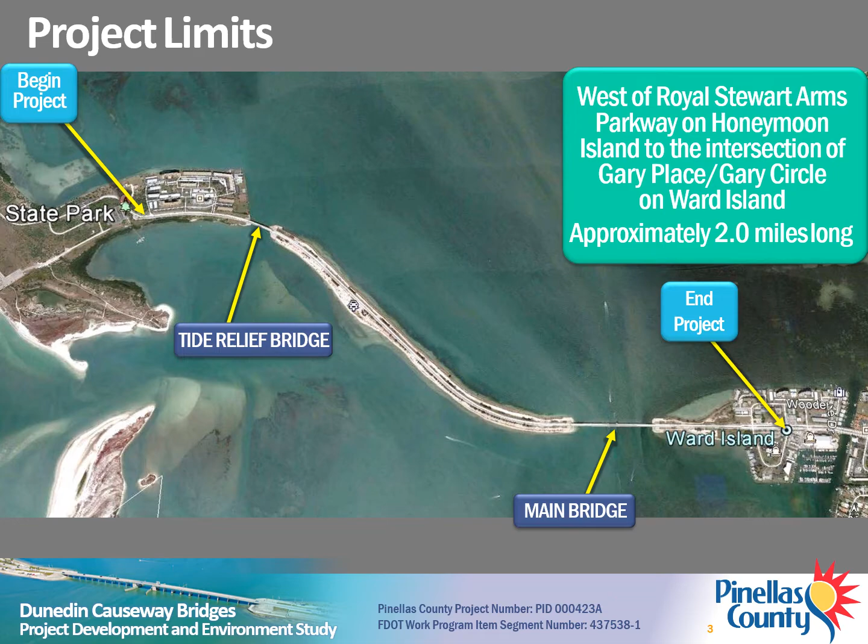Improvements to the roadway or beach areas along the causeway have not been evaluated during this study. The project is consistent with local transportation plans, including the 2045 Long-Range Transportation Plan for Pinellas County, also called Advantage Pinellas, and the Pinellas County Capital Improvement Program.

Both the main and tide relief bridges were constructed in 1963 and do not meet current engineering standards for resisting damage from high waves during significant storms and vessel impact. Due to the narrow width of the bridges, both are considered functionally obsolete. The shoulders on the bridges are only 2 feet wide, and the sidewalks on the north side are only 3.5 feet wide. The multi-use path on the south side of the bridge is only 6 feet wide. Ongoing maintenance and repair of the main bridge machinery also affects reliability and results in traffic delays.

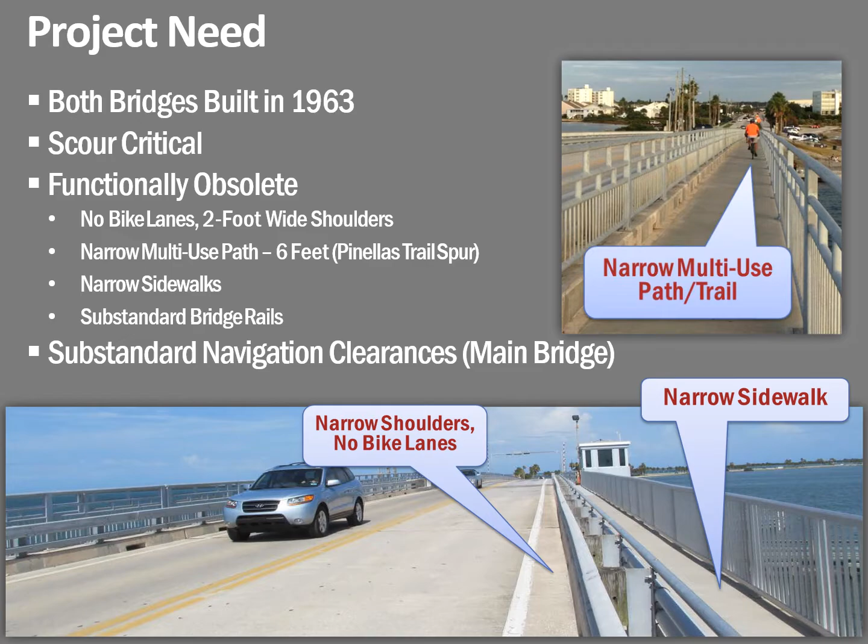The existing main bridge provides a minimum of 20 feet of vertical clearance and 90 feet of horizontal clearance for boats traveling on the waterway. The U.S. Coast Guard guidelines at this location are a minimum of 21 feet of vertical clearance for a new movable bridge. The U.S. Coast Guard recommends a minimum horizontal clearance of 100 feet between the fenders of any new bridge at this location on the Gulf Intracoastal Waterway.

The existing typical section for both bridges includes one 11-foot wide travel lane with a 2-foot wide outside shoulder in each direction. A 6-foot wide sidewalk functions as a multi-use trail as part of the Pinellas Trail Spur on the south side, and a 3-foot 6-inch wide sidewalk exists on the north side. The total width of each bridge is 40 feet 1 inch. Dedicated bicycle lanes are currently not provided.

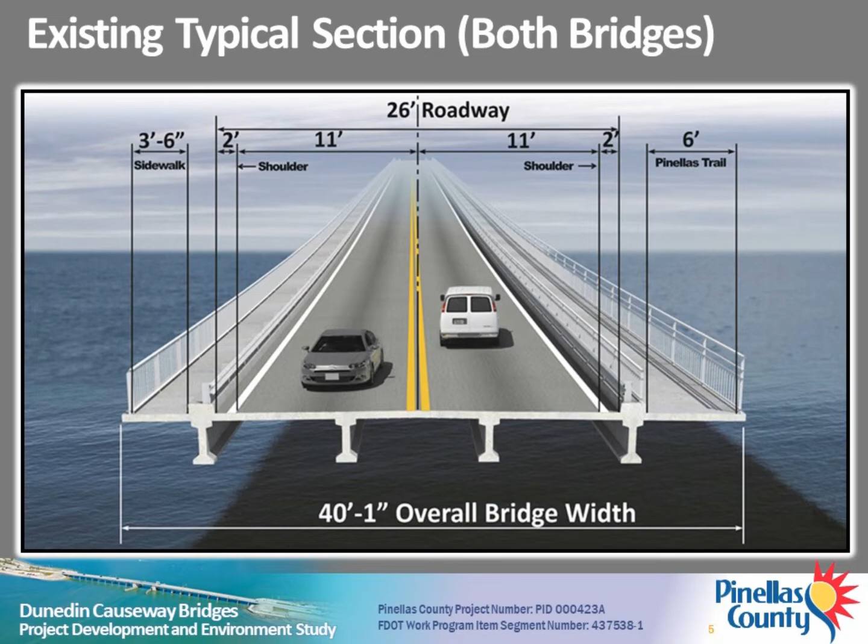Pinellas County held a public alternatives workshop on March 29, 2016 to present the no-build and the build alternatives under consideration at that time. 3 build alternatives for the main bridge and 1 build alternative for the Tide Relief Bridge were evaluated. Based on comments from the public, coordination with local officials, and more detailed engineering and environmental analysis, a preferred alternative was selected for further study.

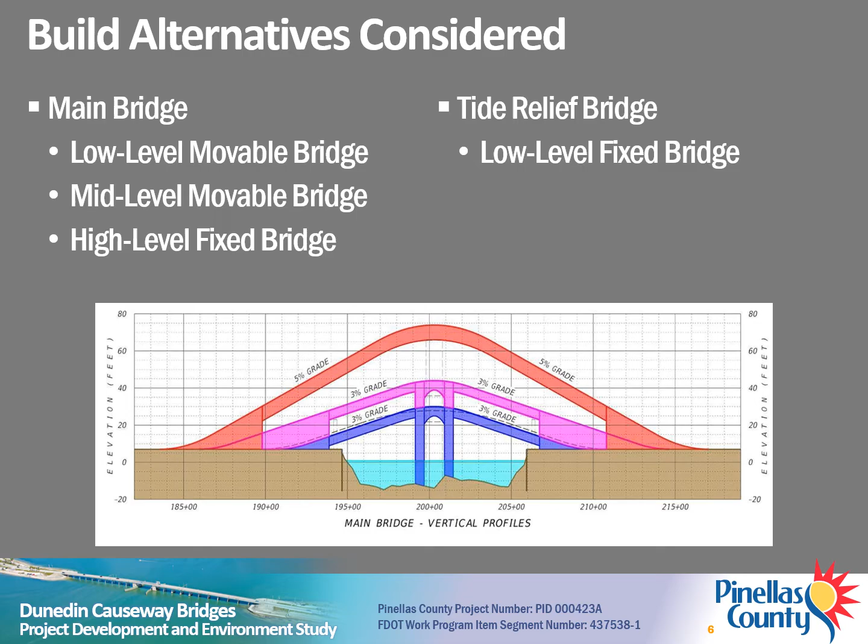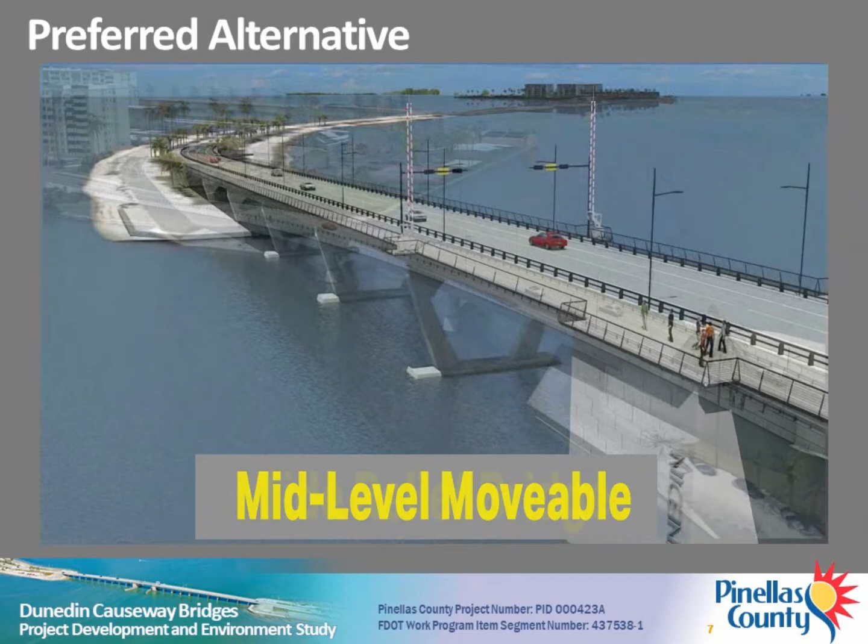The Pinellas County Board of County Commissioners concurred with the staff recommendations for the preferred alternative, which included replacement of the existing main bridge with a new 2-lane mid-level movable bridge and replacement of the existing tide relief bridge with a new 2-lane low-level fixed bridge.

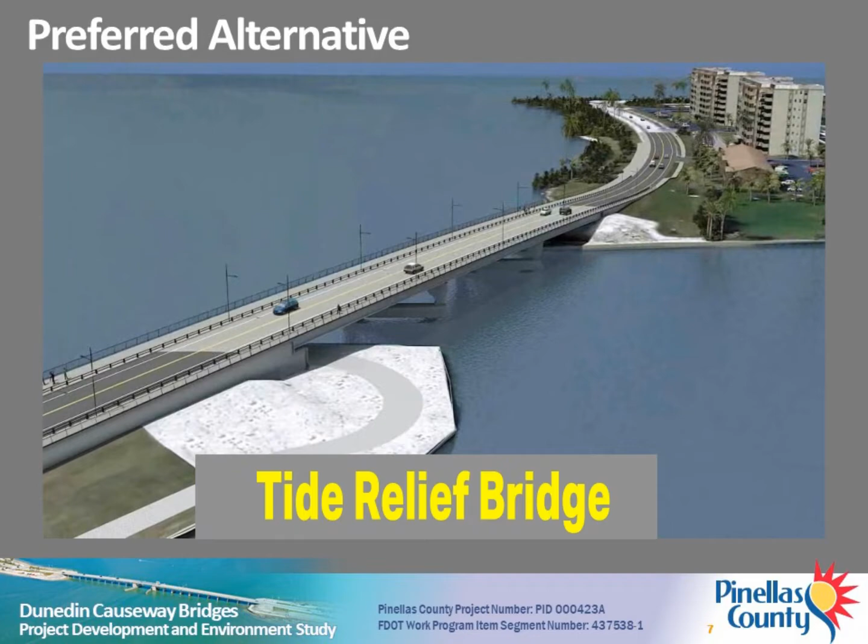The preferred alternative is estimated to cost $86.9 million, with $77.22 million for the main bridge and $9.68 million for the tide relief bridge. Construction of the preferred alternative will not require additional right-of-way. No business or residential relocations will result from construction of the proposed improvements.

The proposed typical section for the replacement of both bridges has a total out-to-out width of 62 feet 7 inches. The typical section includes two 11-foot wide travel lanes with 8-foot shoulders that can function as undesignated bicycle lanes. A sidewalk 5 feet wide is proposed on the north side of the bridge. A multi-use trail as part of the Pinellas Trail Spur 15 feet wide is proposed on the south side of the bridge.

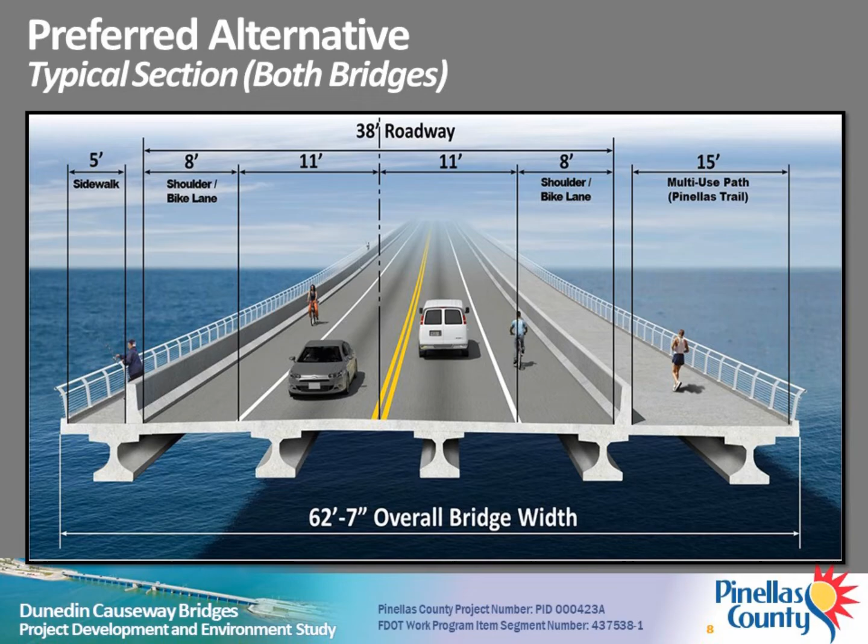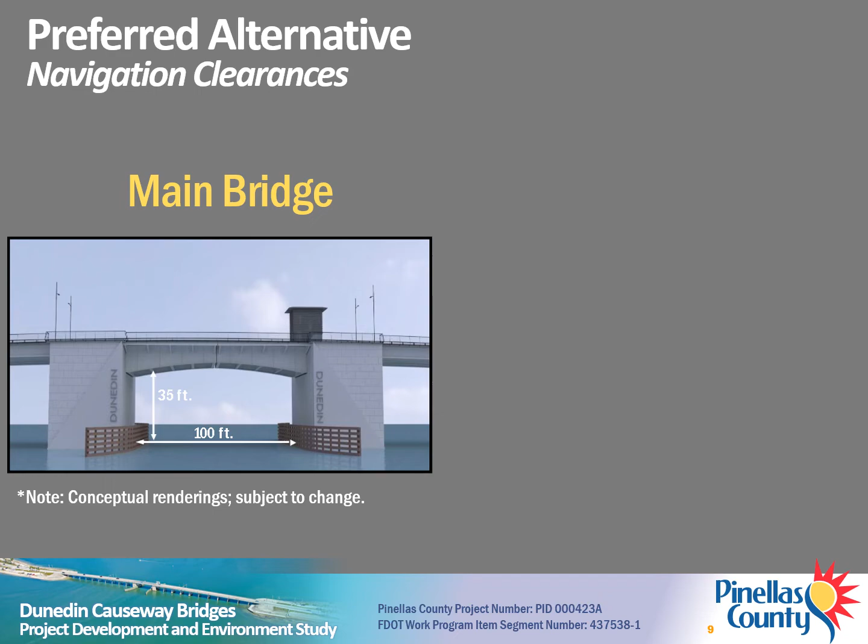The preferred alternative for the main bridge would provide 35 feet of vertical clearance over the navigation channel at the fenders in the closed position, which exceeds U.S. Coast Guard clearance requirements. Unlimited vertical clearance will be provided in the open position for the width of the channel between the fenders. The horizontal clearance between the fenders will be 100 feet. The new bridge would be constructed within existing right-of-way on approximately the same alignment as the existing bridge, and a temporary bridge would be required during construction.

The preferred alternative for the tide relief bridge would provide 14.5 feet of minimum vertical navigational clearance and 18 feet at the center span. The horizontal clearance between the piers will be 115 feet. The new bridge would be constructed within existing right-of-way on an alignment slightly south of the existing bridge.

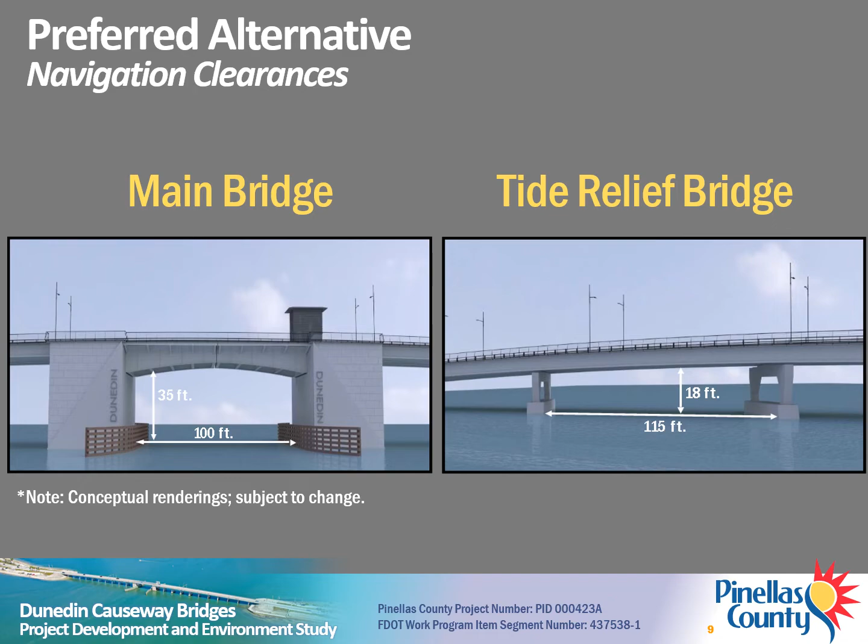There are advantages and disadvantages associated with constructing the preferred alternative. Advantages of the preferred alternative include: existing functional deficiencies would be corrected. Design life of bridges would be 75 years. The replacement bridges can be constructed within existing right-of-way. An existing grade of 3% would be maintained for the main bridge. Vertical navigation clearances for the main bridge would be increased to exceed U.S. Coast Guard standards. Vehicle turnarounds would be provided underneath both ends of the main bridge and the eastern end of the tide relief bridge. The number of bridge openings for the main bridge would be reduced by approximately 50% compared to the existing condition.

Disadvantages of the preferred alternative include: a temporary bridge would be required for the main bridge during construction. Increased visual impacts. Construction costs are higher than the no-build alternative. Minor impacts to wetlands would occur.

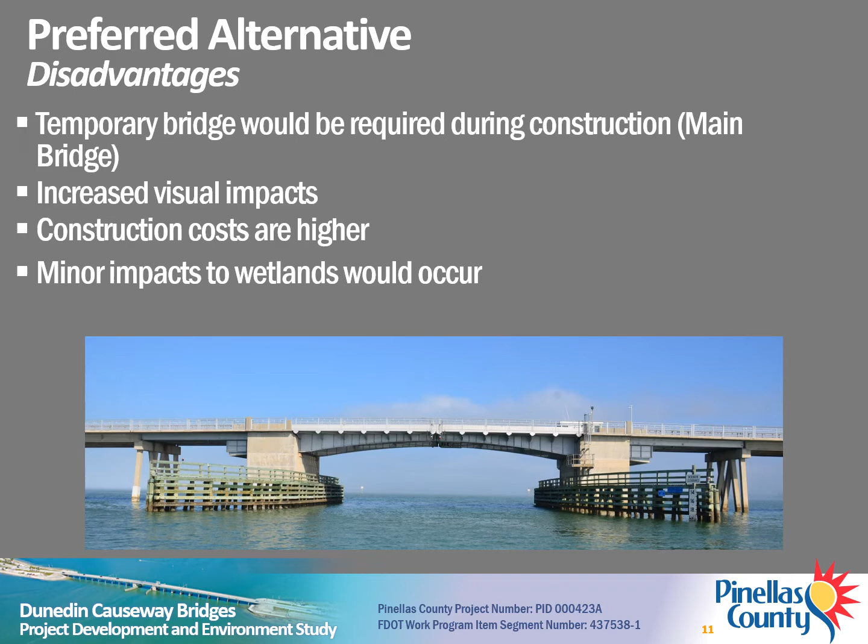In addition to the preferred alternative, the no-build alternative is considered a viable alternative and will remain so for the duration of this study. Under the no-build alternative, the main bridge and tide relief bridge would not be replaced, and only routine maintenance efforts would occur. Advantages of the no-build alternative include: no adverse impacts to recreational areas, wetlands, and wildlife. No visual impacts. No changes in access to local streets or recreation areas. No major project cost other than escalating maintenance costs.

Disadvantages of the no-build alternative include: does not meet the purpose and need of the project. Existing functional deficiencies would not be corrected. Existing vertical clearance for the main bridge would not be improved to meet U.S. Coast Guard guide clearances. Substantial continuing bridge maintenance would be required. Expected service life would be relatively short, about 10 to 15 years.

The project team looked at various environmental factors as part of the alternatives analysis. The project was evaluated for natural resources, which consists of threatened and endangered species and their respective habitats, including wetlands and surface waters. Cultural resources, consisting of archaeological and historic resources. Social and economic resources, including community impacts, such as residential and business relocations. And physical resources, including traffic noise, air quality, and contamination.

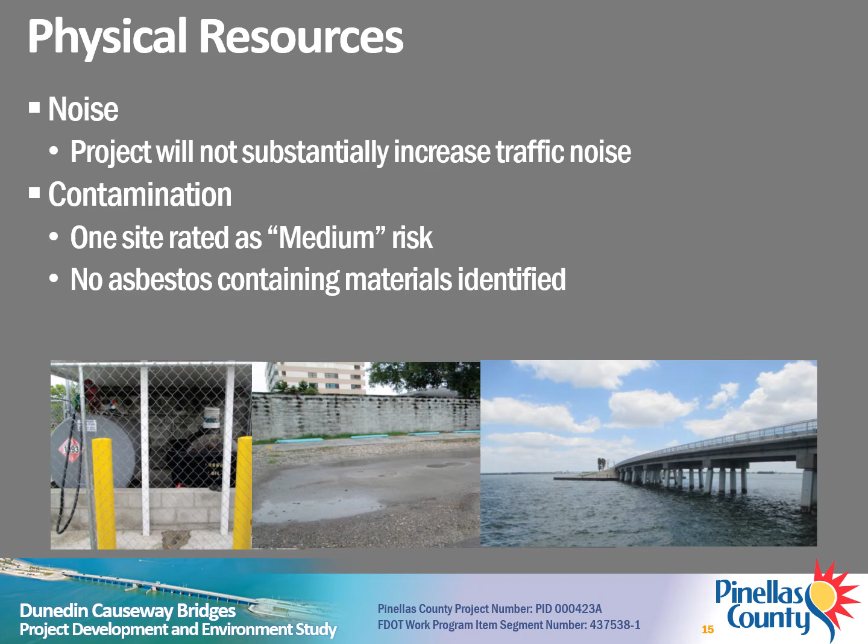9 sites were identified in the vicinity of the study area relative to environmental contamination risks, with 1 site being rated as medium. The bridge structures were also surveyed to determine the potential presence of asbestos and metal-based coatings. No asbestos-containing materials were identified. However, metals in the paints or coatings exist on the steel surfaces of the bridge structures. Pinellas County will further evaluate the potential contamination risks during the design phase of the project.

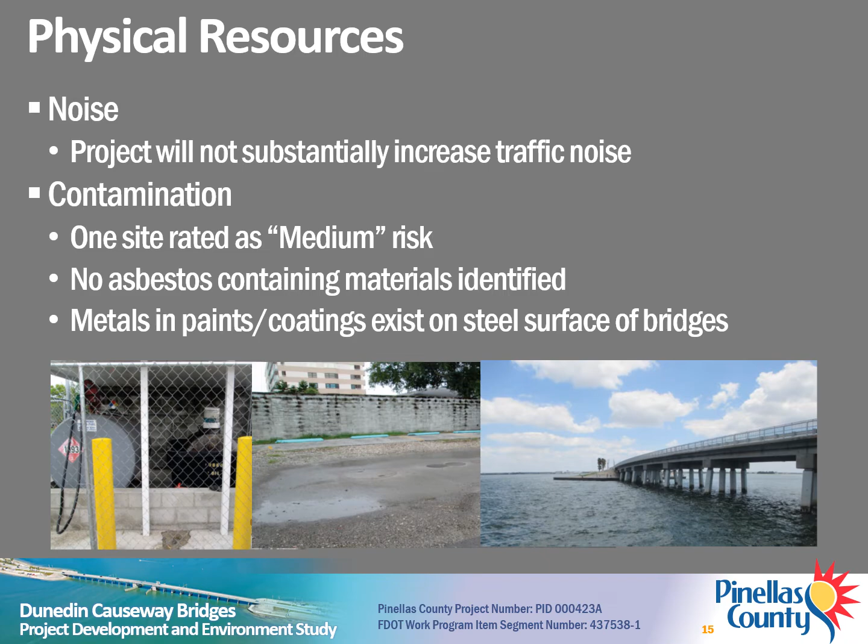Project archaeologists and historians have completed a cultural resource assessment survey of the project corridor. A maritime remote sensing survey was also conducted to identify potential submerged archaeological resources. Based on the results of these surveys, it was determined that the proposed project will have no involvement with any archaeological sites or historic resources that are listed, eligible, or considered potentially eligible for listing in the National Register of Historic Places, and no further archaeological survey was recommended.

The project has been evaluated for potential Section 4(f) impacts. The provisions of Section 4(f) apply to any significant publicly owned parks, recreation areas, or wildlife and waterfowl refuges, as well as historic and archaeological sites, and properties which represent public multi-use land holdings. The preferred alternative will require permanent use of approximately 0.22 acre of the county-owned beach area of the Dunedin Causeway.

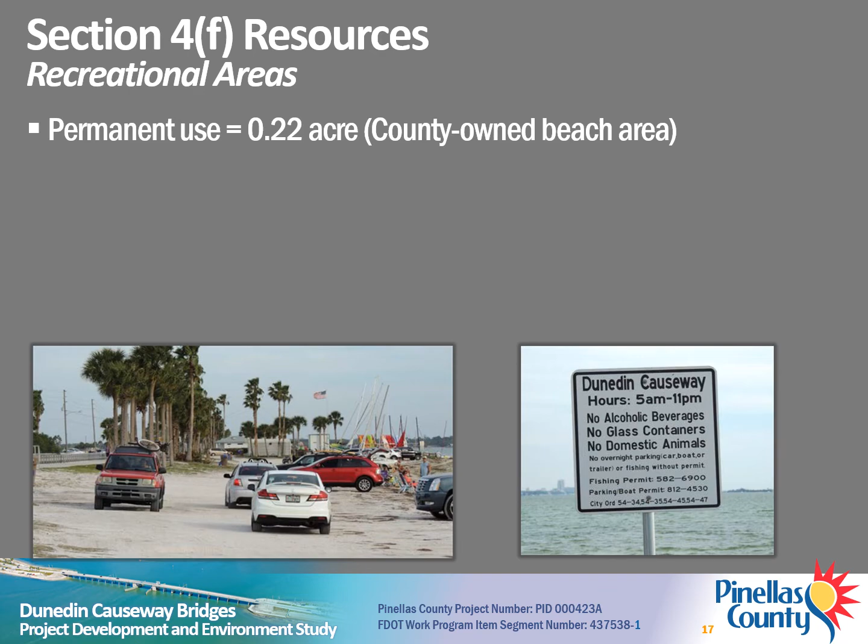The impact of the preferred alternative is minor and will not adversely affect the activities, features, or attributes that make the county-owned beach area of the Dunedin Causeway eligible for Section 4(f) protection. Therefore, the project sponsors are seeking approval for a de minimis finding for impacts to this resource. This hearing provides the opportunity for public comment on the project's use of the recreational areas of the Dunedin Causeway.

If you have not had an opportunity to do so, you can review the proposed improvements on the display boards here tonight. A detailed alternatives comparison matrix is also on display this evening and is provided in tonight's handout. Following tonight's hearing, the project team will review all public input. We will then finalize the study documents and submit them to the FDOT Office of Environmental Management for review and approval, which is anticipated in late spring or early summer of 2020. Once approved, the project will move into the design phase, which is currently funded to begin in fiscal year 2024.

Draft study reports are available for review at this hearing and have been on public display at the Dunedin Public Library and the Pinellas County Public Works Building. The display period began on February 19th and will continue through March 23, 2020.